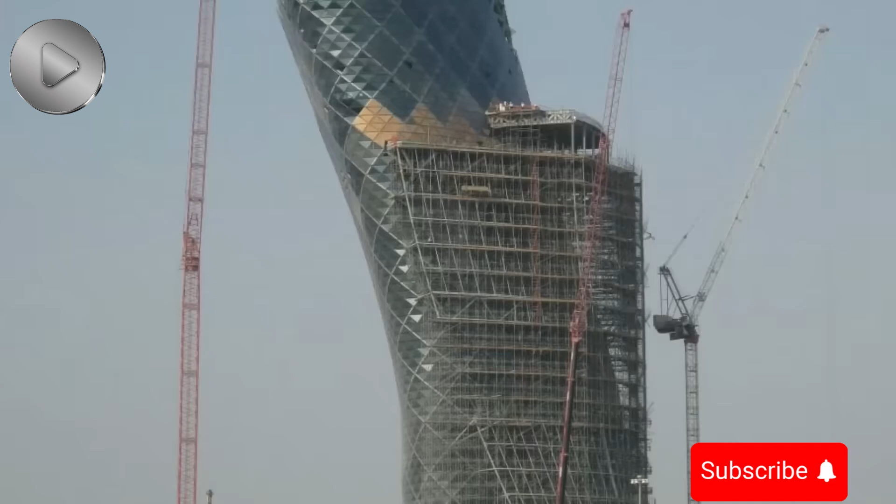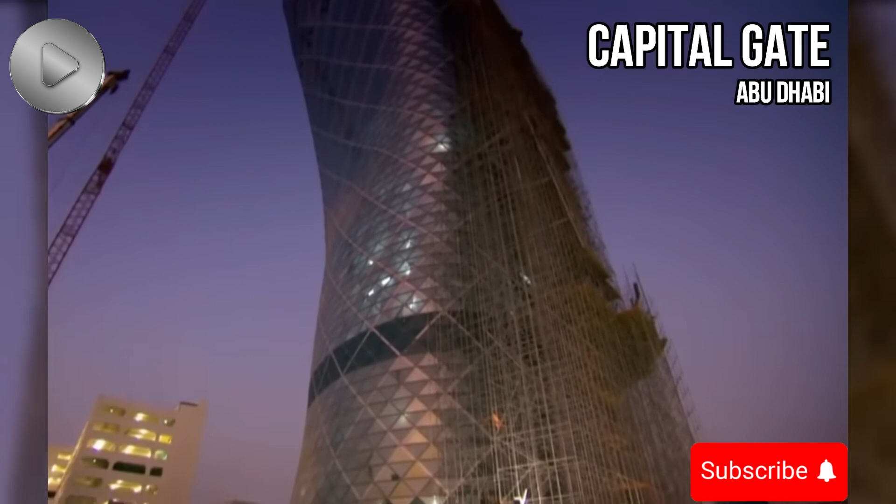After 3 years of hard work, engineers and architects in Abu Dhabi had built the structure of a building which was not possible in any way. This was the structure of the Capital Gate building, built on the special request of Abu Dhabi's Khalifa bin Zayed Al Nahyan, because the weight of millions of tons of this building was tilted only on one side. Due to this, the engineers were worried that if even a little weight was increased beyond calculation, this structure could collapse in a moment.

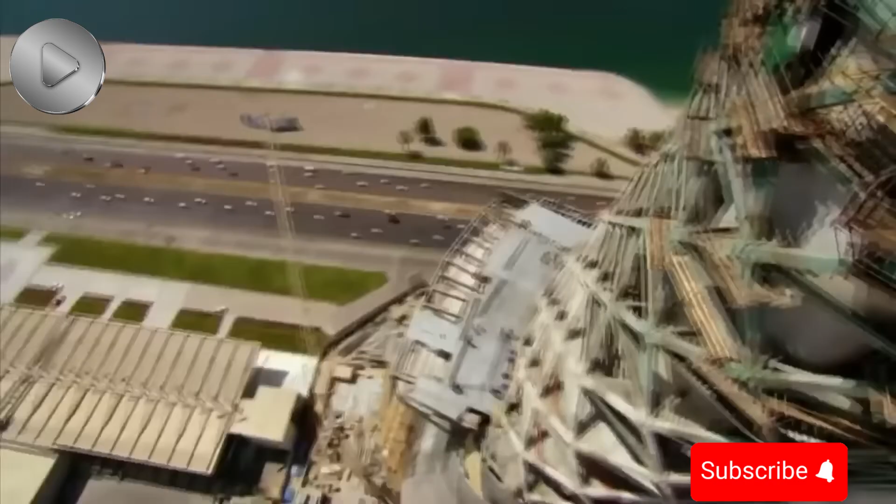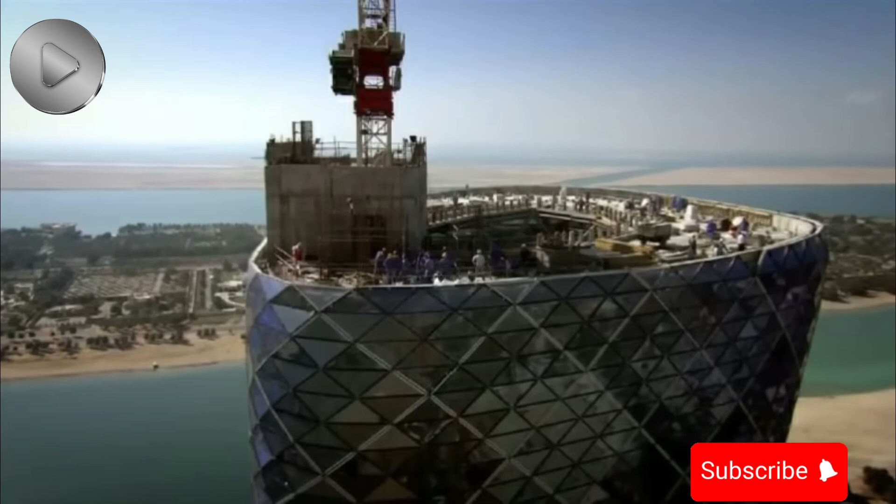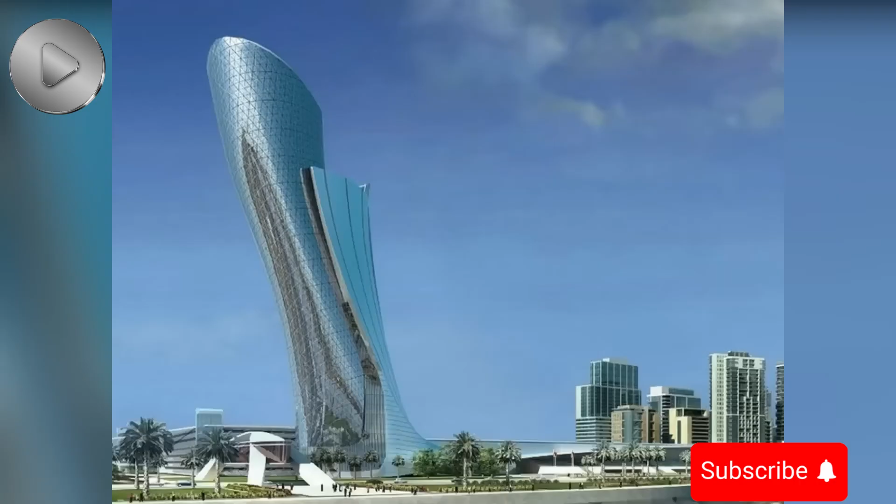The difficulties faced by the construction team to reach here were probably not even faced by the construction team of Burj Khalifa, because the design of Capital Gate was very close to breaking the laws of physics. When the building was ready for launch, a message came to the construction team from the Khalifa of Abu Dhabi saying he needed a helipad on top of this building even today. This message fell like a mountain on the construction team because the load of the building was already at its extreme limit. There was no space left for a helipad, the design did not allow it, and the engineers did not have the courage to refuse the sheikh. So only one solution was left: the helipad had to be made possible somehow, but the issue was how to build it.

Capital Gate in Abu Dhabi is the only building in the world which is not so tall, but has shaken the rules of architecture. This 524 feet tall building has more weight than an ordinary building leaning to one side, but this is not due to any mistake. Rather, it was its design, because the tilt of Capital Gate is 5 times more than the Leaning Tower of Pisa in Italy. Due to this, it has also earned a Guinness Book of World Record.

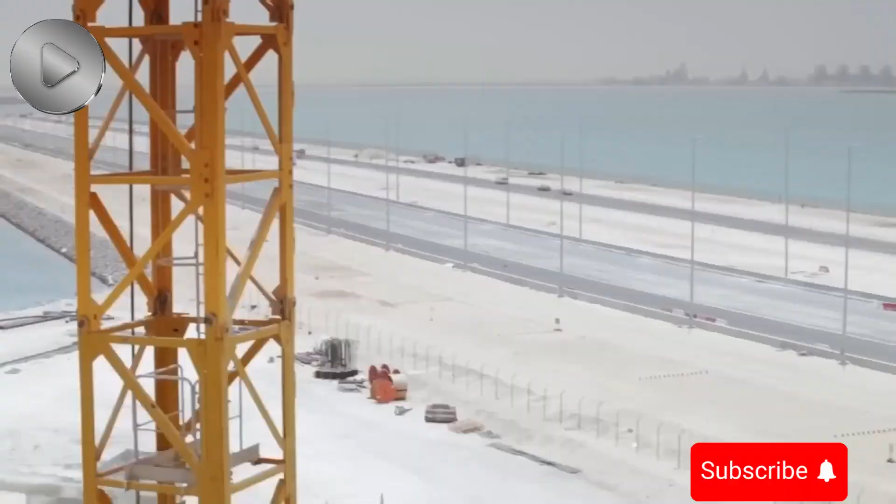But what was the need for the Sheikh of Abu Dhabi to build such a dangerous building? There is a race going on in the world to build unique structures one after the other. In this race, only the one who builds the most different and most difficult structure will win. To participate in this race and attract tourism from all over the world, Abu Dhabi's Khalifa bin Zayed Al Nahyan also entered the field in 2007. His target was not to build the tallest building, but a building whose design would be seen by people from all over the world, which would not take much time to build, and which would also challenge the laws of physics. To fulfill this purpose, Khalifa appointed his cousin Sheikh Sultan.

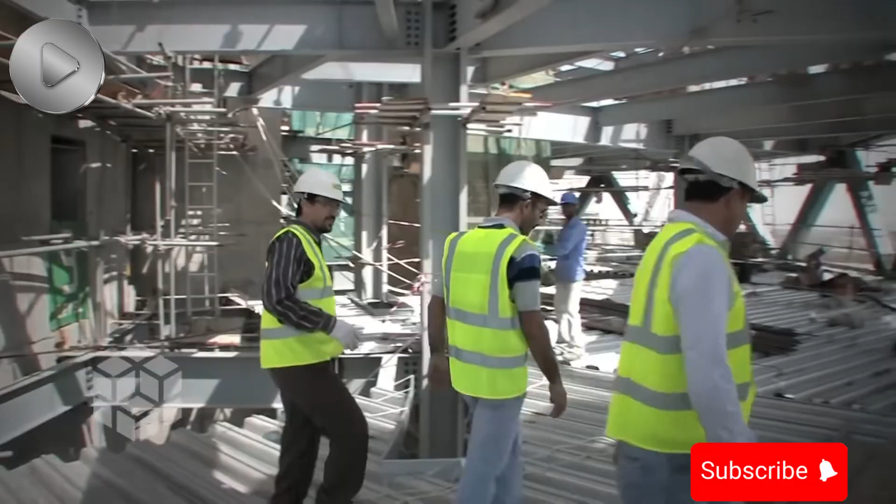As soon as he got this task, Sheikh Sultan took the initiative from London's top architecture firm RMJM, and this was the first step to build this building. How the engineers and workers accomplished this dangerous challenge, how this building was tilted at exactly 18 degrees, and how this building weighing millions of tons was saved from falling, you will be able to know all this in today's video.

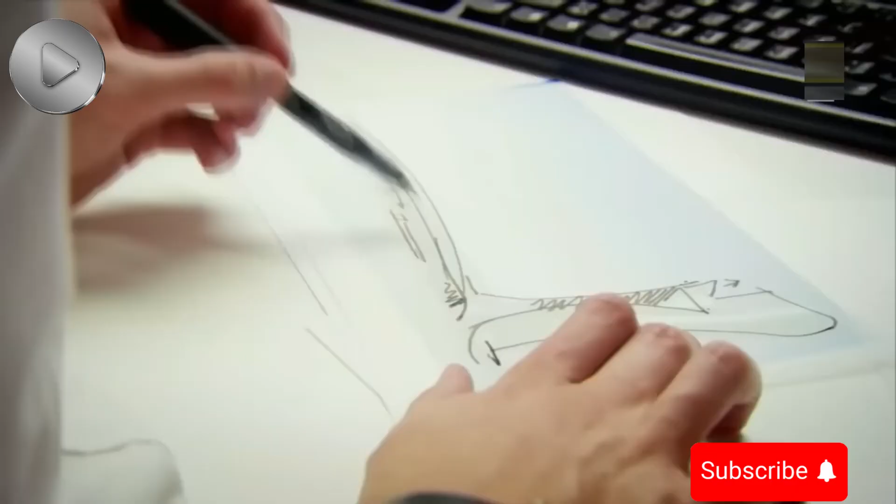When this task was given to the London-based architecture firm, this was their biggest challenge. They had to make a design that was against the architecture rules they themselves had made. Many designs of the firm were rejected at first. To create this design, they took inspiration from the beautiful sand dunes and sea waves present in the desert of Abu Dhabi, and now it was time to give shape to this beautiful creation of nature. Concept architect Neil van der Veen worked day and night to present a design shaped like a sea wave, with its bottom like sand dunes, and whose appearance changes completely when viewed from every angle.

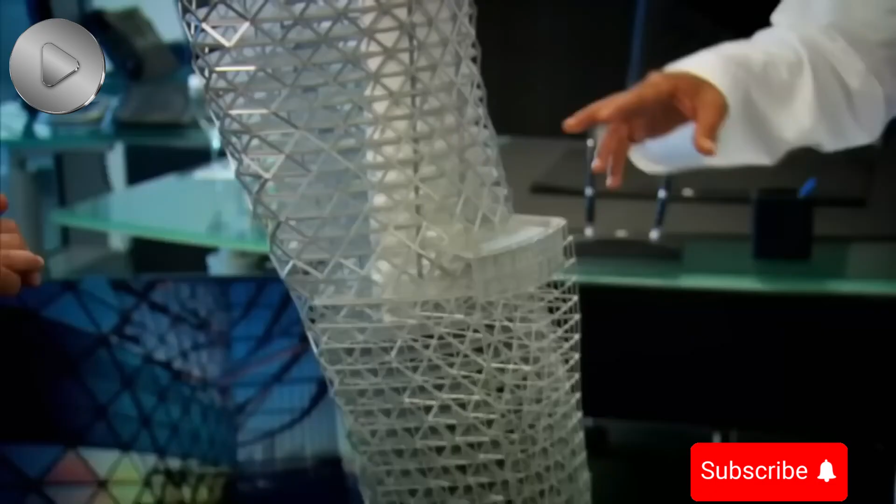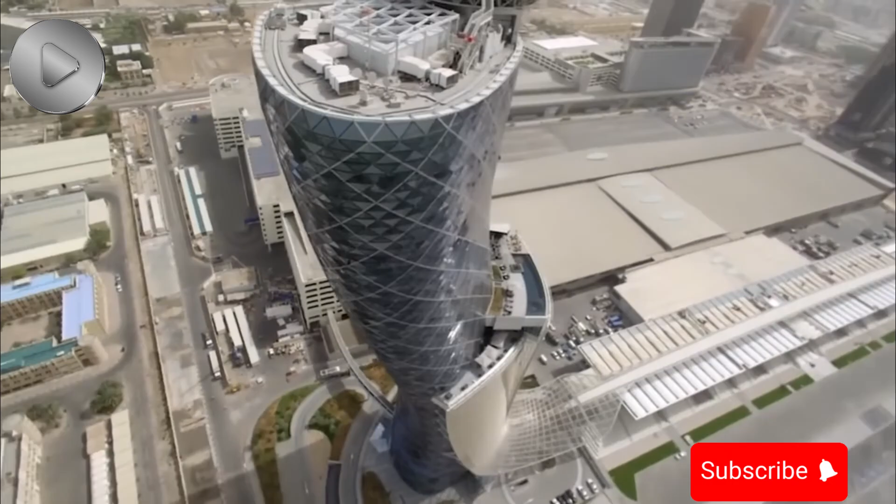Challenge number 2: this design was liked a lot by the Sheikh, but there was one issue in it. Yes, to make the design of the Capital Gate a reality, extraordinary engineering was needed, because according to the design, the top of the building was 108 feet away from its bottom, and due to this immense forces would be generated, and the foundation of the building would be uprooted from the ground itself. So now it was a challenge for the construction team to prepare a foundation which could easily bear the weight of lakhs of tons of the inclined side.

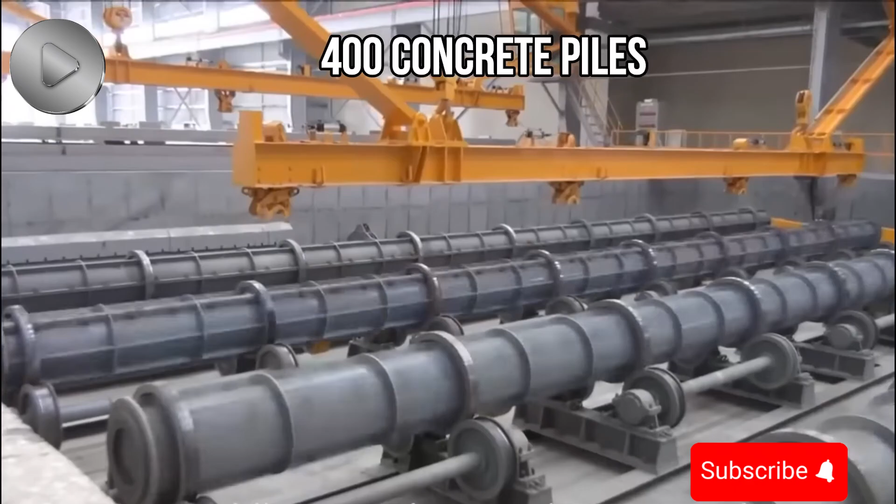To accomplish this challenge, the project architect Tony Archibald started the work of making the foundation. 400 concrete piles were used in the foundation of the Capital Gate. It was decided to use piles, that is, the entire building was to be laid on thick iron pipes with concrete filled inside them. But this was not a normal foundation.

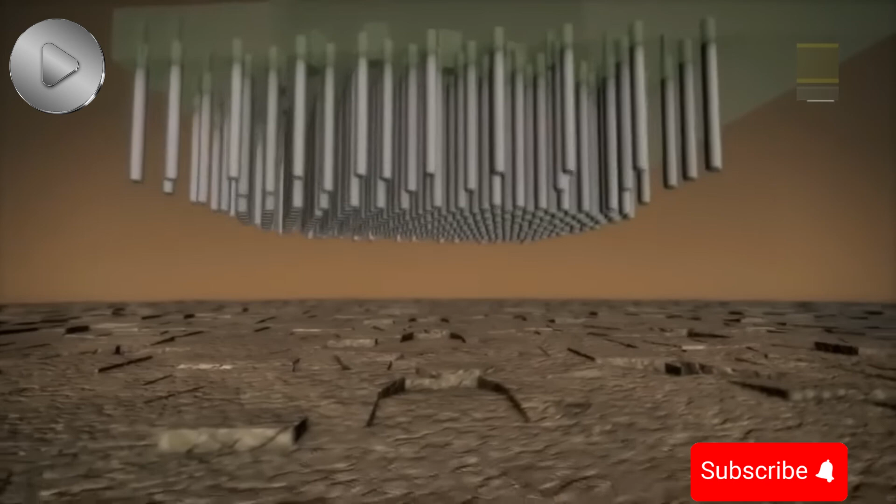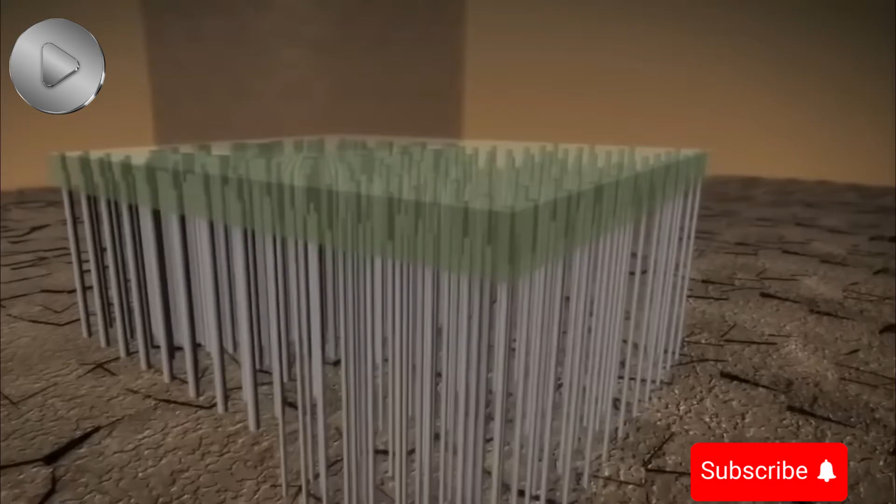200 piles were placed in the foundation under the side where the building would tilt, while the length of the piles on the other side was kept longer, and they were inserted into the large stones present inside the ground. The engineers thought that in this way the load of the foundation would be completely distributed, but that was not the only challenge of making the foundation.

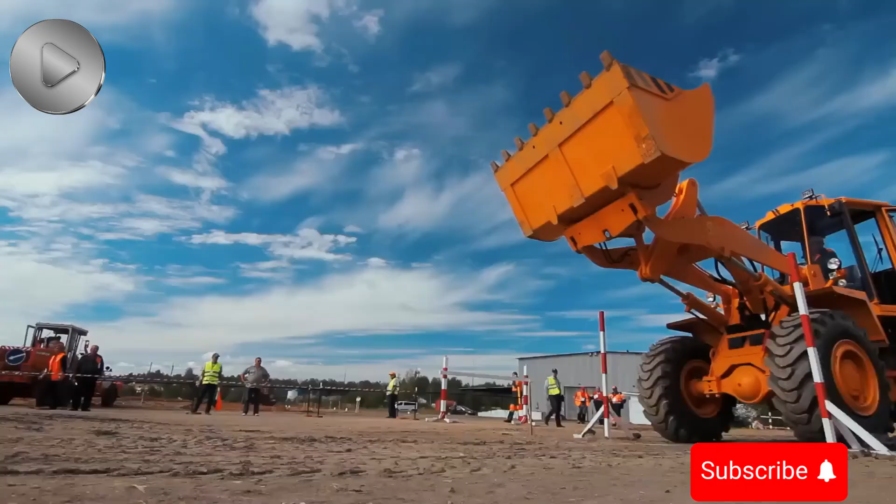Challenge number 3. The design of the Capital Gate was ready, and now the engineers had also prepared a plan for an extraordinary foundation to distribute the load of the leaning tower. Now it was time to start the foundation work. For this foundation, digging was required on a very large level, and about 9,600 tons of soil had to be removed from the ground, that is, the weight of the soil removed to lay the foundation was equal to the weight of 1,600 elephants.

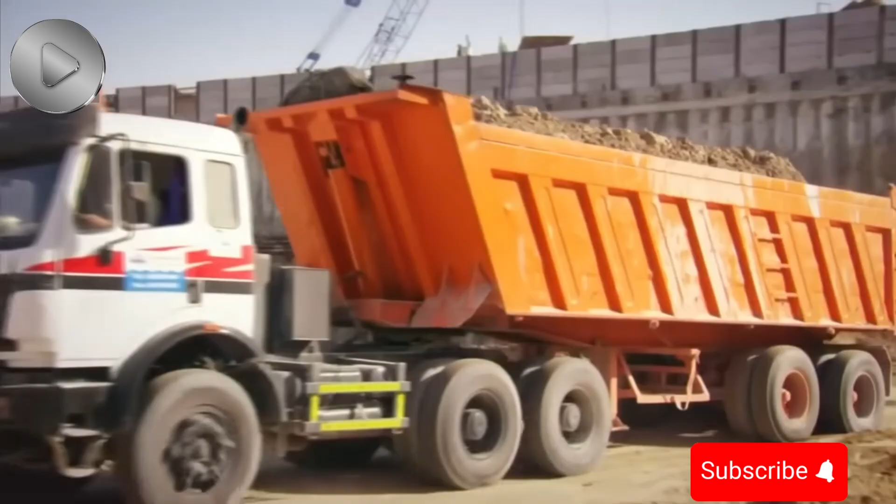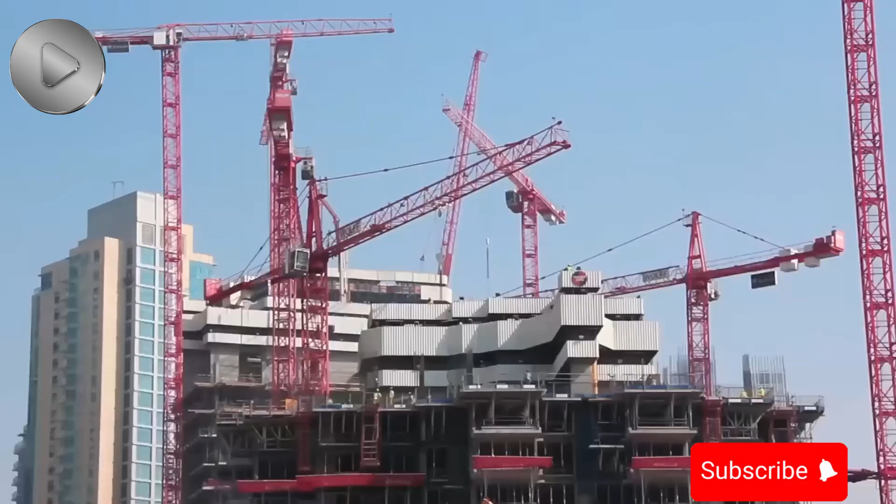Months were required to complete this work, but suddenly another issue arose. Yes, on this occasion Sheikh Khalifa issued a deadline for this building, because exactly after 2 years, the Future Energy Summit was to be held in Abu Dhabi. That is why Khalifa wanted the building to be completed before this energy summit. That is, now the engineers had only 24 months in which they had to lay the foundation, build the building, and also complete the interior work.

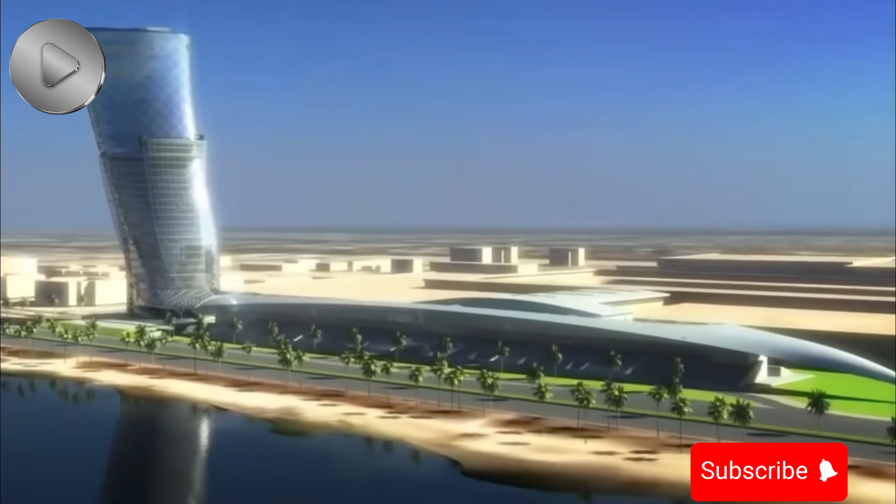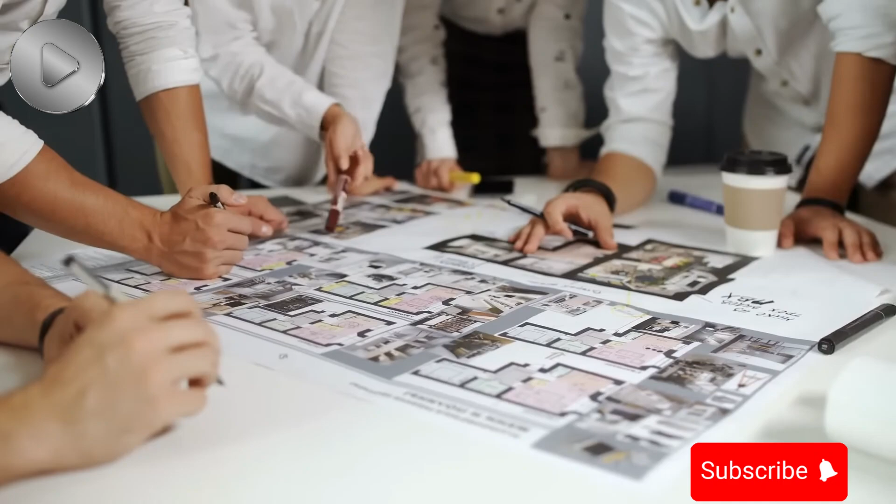As soon as this challenge was received, there was panic in the entire construction team, due to which they had to change the entire construction time frame. That is, the foundation for which 8 months of time was requested was completed in just 3 months by working day and night, because there was no other option.

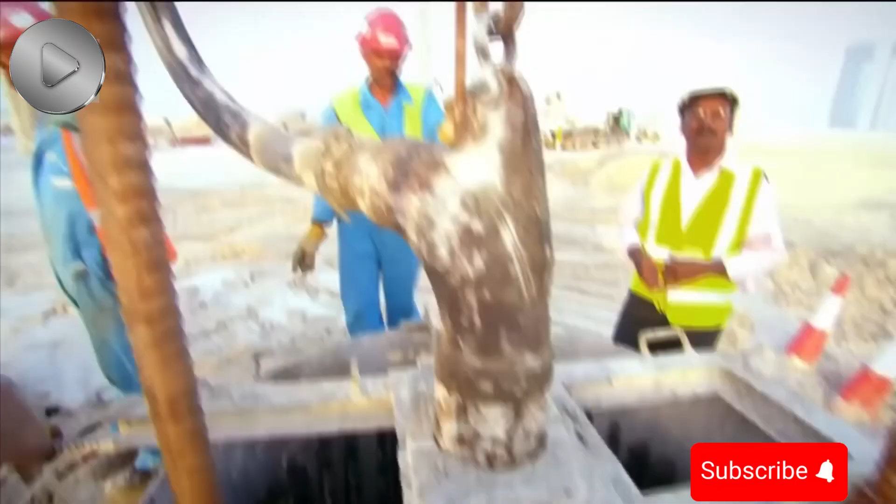Challenge number 4: as soon as the foundation dried completely, the construction team once again came into the field. Now their challenge was to start the construction of the tower, but here they had to face another challenge. Normal skyscrapers are made with a solid core which goes straight up, but in the case of Capital Gate, if such a core is made, then due to the inclination, the core can bend to one side, which can have very dangerous consequences.

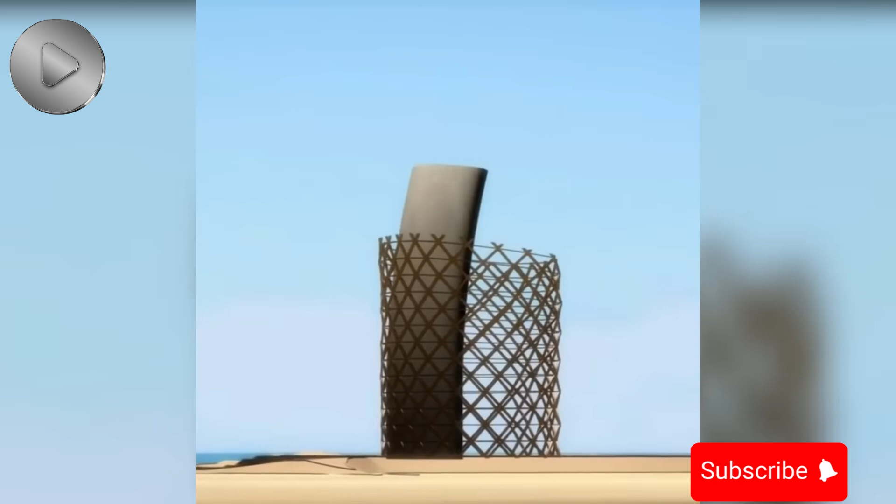To deal with this issue, the engineers had to work away from traditional thinking, for which it was planned that the core of the Capital structure would not be made straight but curved, and after the completion of the core, the remaining part of the building would be fitted around it. Therefore, now the work of the Capital core had to be started as soon as possible so that the work could be completed before the deadline.

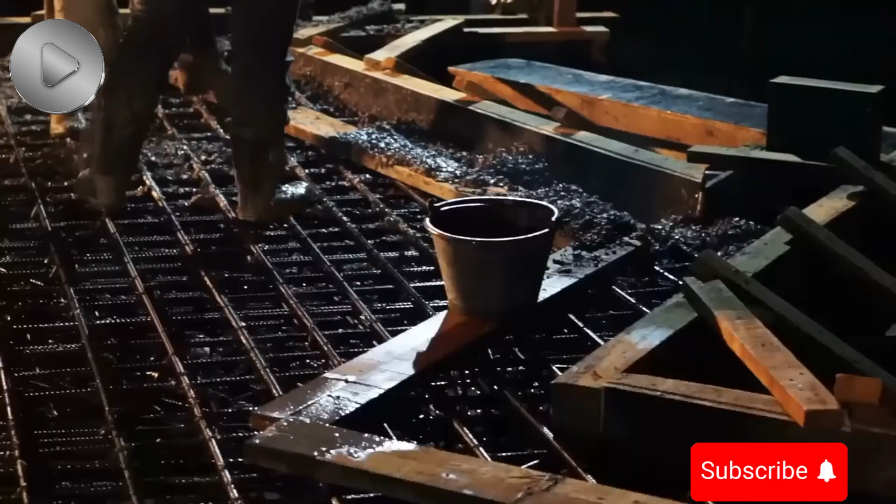Challenge number 5. To make this special type of core, surprisingly, steel worth 2 crore 15 lakhs and cement concrete worth 3 crore 60 lakhs were to be used. But now another issue arose: in the scorching heat of Abu Dhabi, the temperature reaches up to 50 degrees centigrade during the day, so if the concrete is poured in this heat, it will set before time.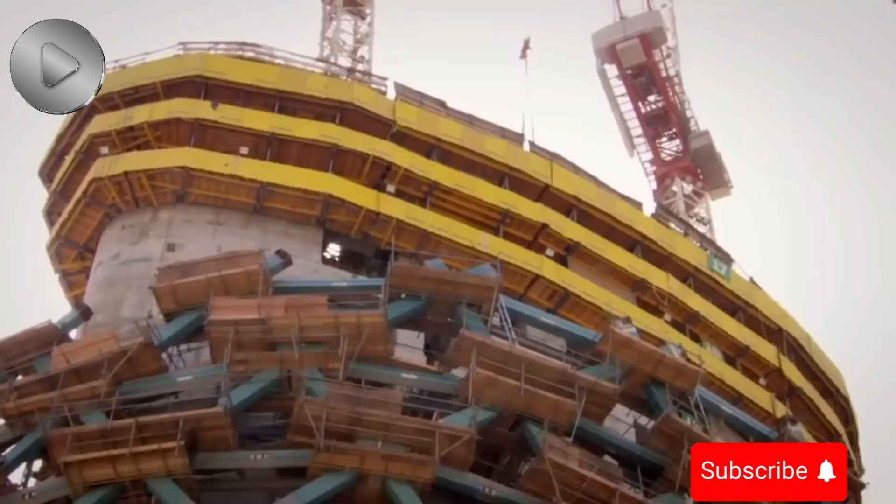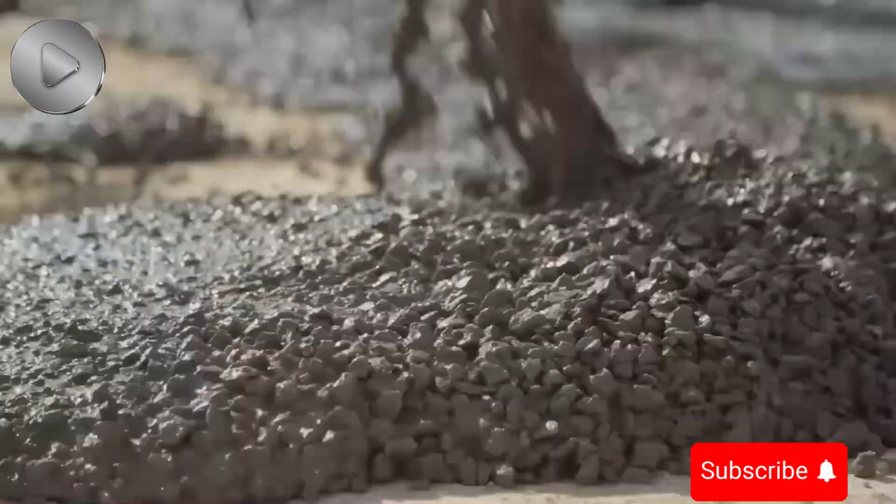There was a risk that cracks could form in the core. Therefore, the construction team had to think of a solution that would not let the concrete dry as soon as the concrete was poured. Ultimately, it was decided that the water used while making the concrete would not be of normal temperature but cold water, and the concrete would be poured not in the daytime but at nighttime, when the temperature would reach 30 degrees centigrade.

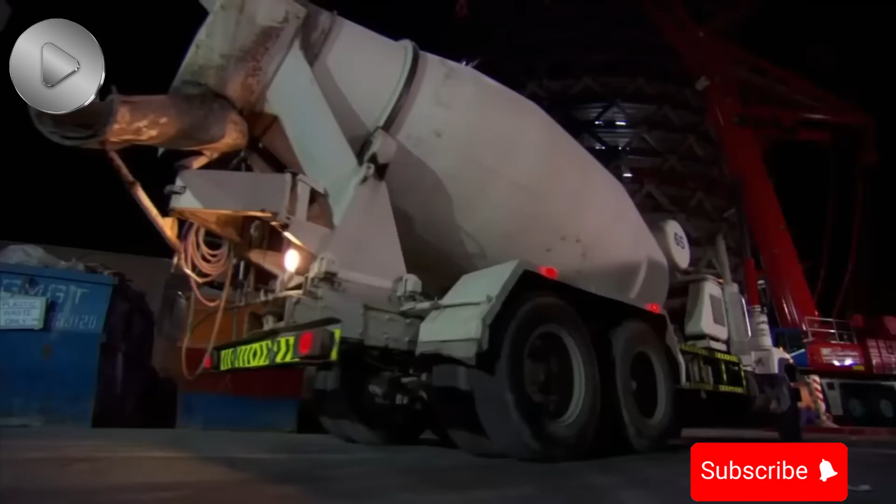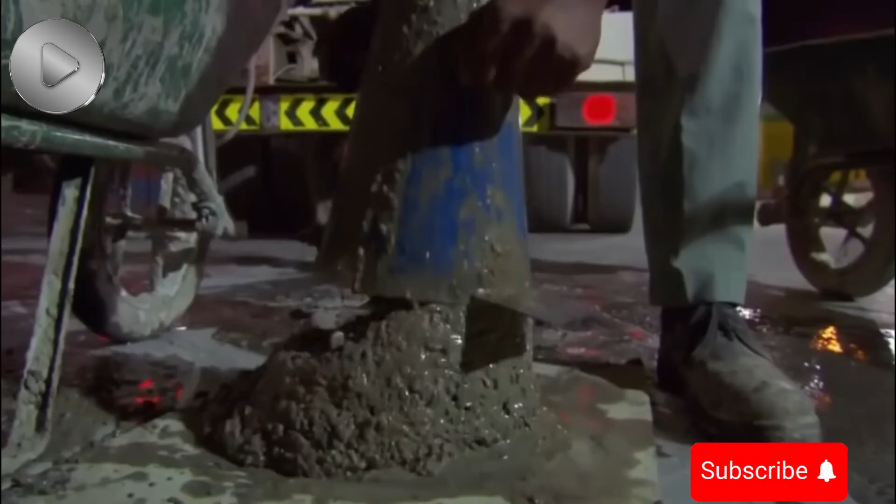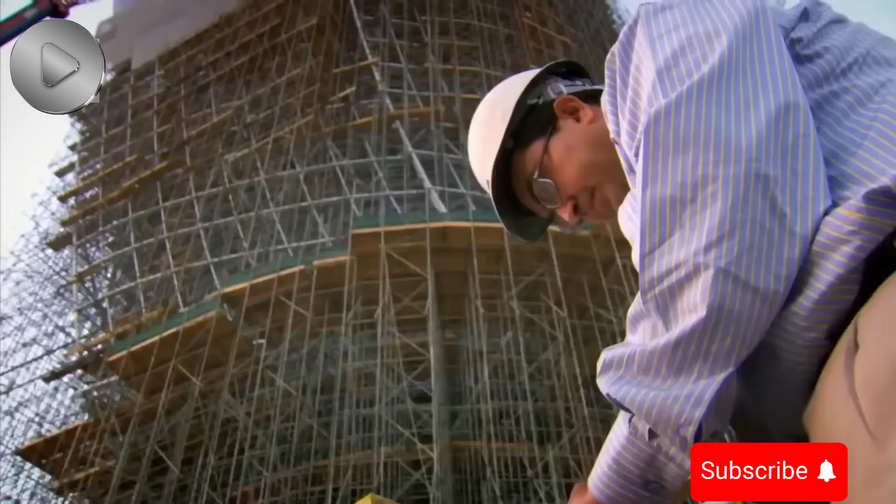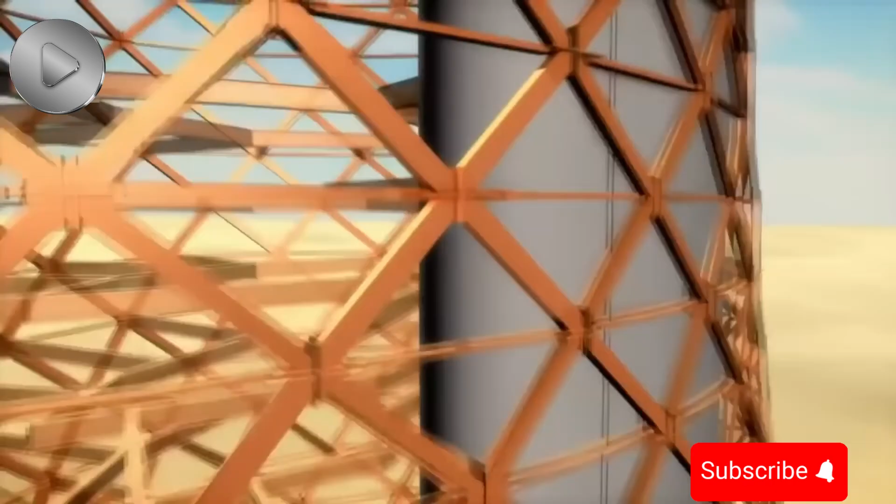Challenge No. 6. A world-class structure was being built in the center of Abu Dhabi, more than half of which was already completed, but the real challenge was yet to come. Yes, the construction team had given a slightly curved shape to the core, but now it was the turn of the actual tilt of the building, for which diagrid technology had to be used, in which a frame made of iron was to be bent in small parts by placing the core in the building.

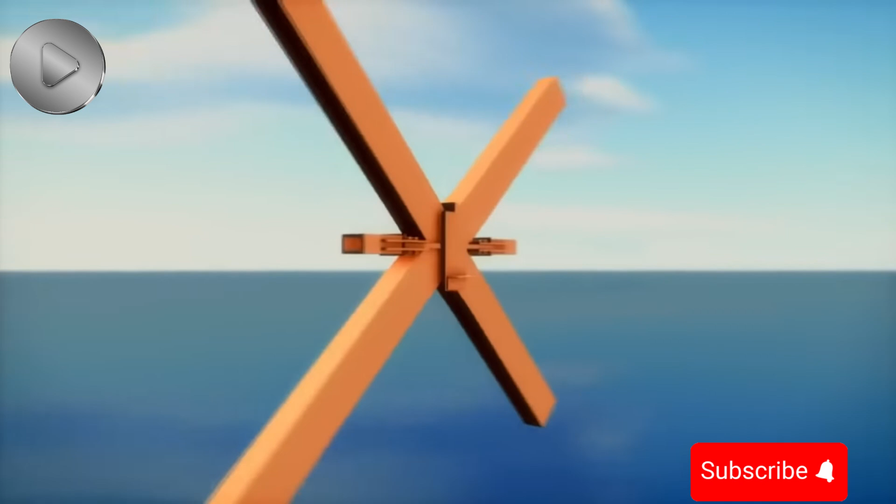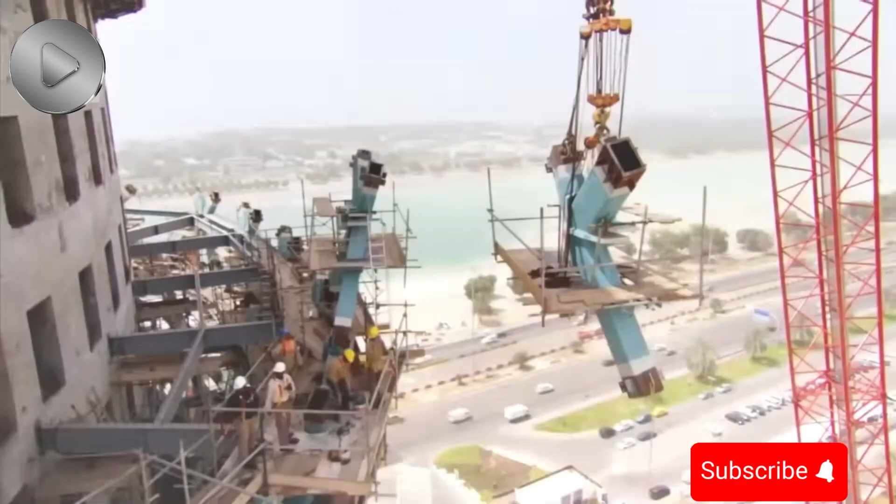A total of 720 large iron frames were to be made, but due to the shape of the building, each frame had to be designed separately, i.e. a total of 720 iron frames. The weight of each frame was 16,000 kg, and each frame shape would be different from each other. To complete this work, a steel manufacturing company of Sharjah was given the challenge, and because each frame shape was different from each other, it took them 5 months to complete all 720 frames.

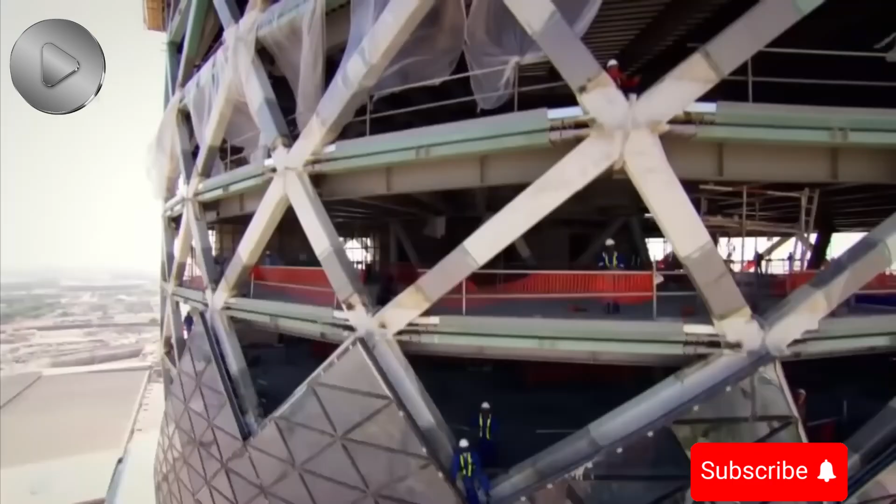Challenge number 7. Finally, as a result of the tireless hard work of the workers, the Capital Gate was completed, and the work of installing window panes was also going on. Only minor works were left in the building, which had to be completed before the deadline given by Sheikh Sultan. The building was now very close to completion when suddenly a message came from the office of the Khalifa of Abu Dhabi, in which he demanded a helipad on the top of the Capital Gate.

This message fell like a mountain on the construction team because everything from the foundation to the diagrid had been completed, and the entire load of the Capital Gate was calculated earlier. Note that the weight of the helipad and the helicopter was not included while designing it. This proved to be the biggest issue that arose during the construction of the building.

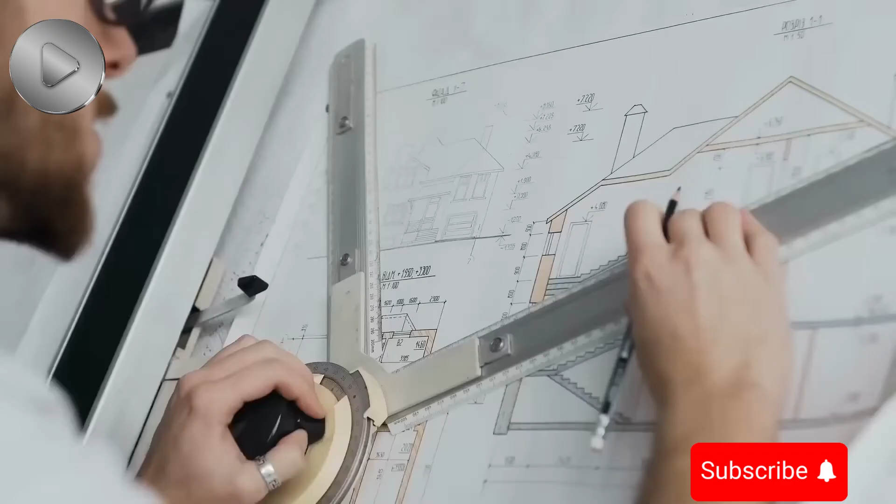So now the finishing work was stopped, and once again all the structural calculations were done. After the calculations, it was concluded that the structure would bear the weight of the helipad. But the design of the structure is such that in strong winds, the helicopter could crash while landing on the building. But this helipad was to be built in any case because this was the Sheikh's request.

For this purpose, the model of the Capital Gate was wind tunnel tested in London, in which it was proved that landing of the helicopter on the building in strong winds would not be free from danger. The wind engineer Leighton Aurelius suggested that if changes are made in the design of the helipad and the height of the helipad is reduced by 2 meters, then this issue can be reduced to a great extent.

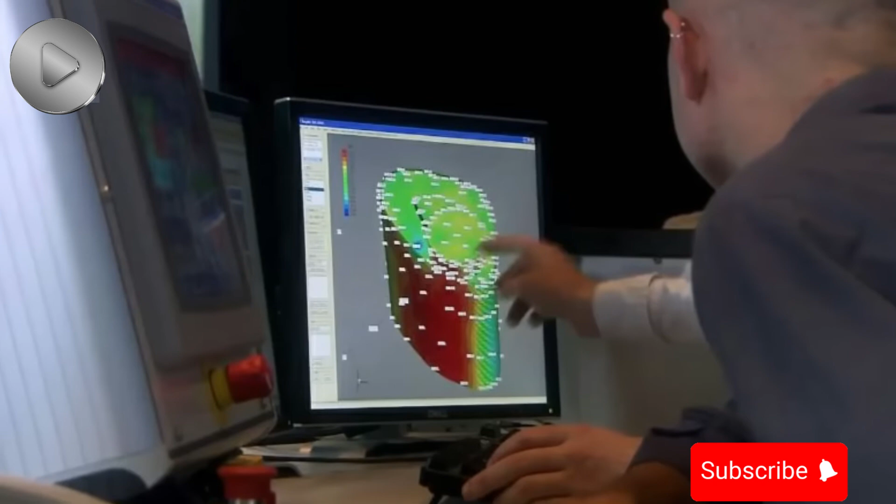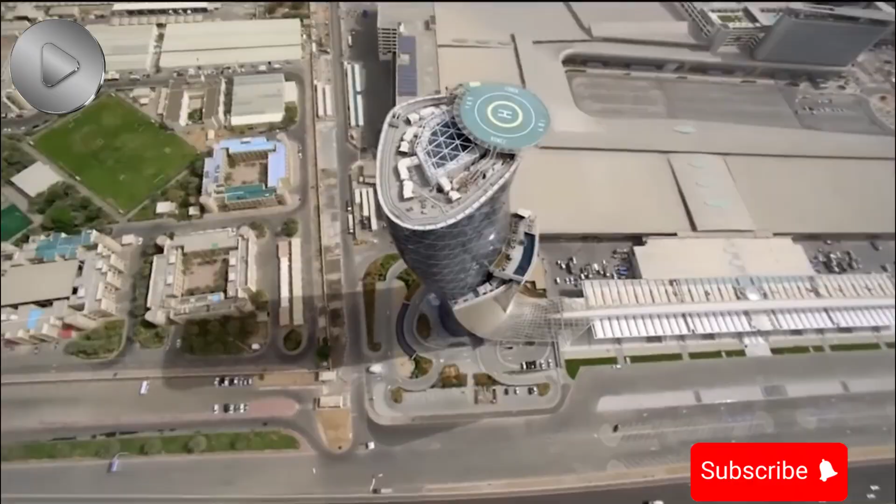When the design of the helipad was changed in the model, surprisingly the wind engineer's suggestion proved to be true. As soon as this news was received, the construction of the helipad was started at the Capital Gate, and the building was handed over to Sheikh Sultan before time. Salute to the construction team and workers who have built the world's furthest leaning tower with their ability.